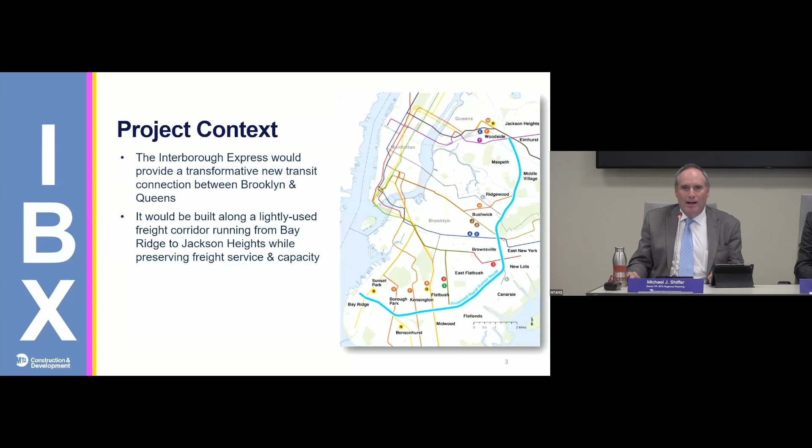The northern portion of the corridor in Queens, roughly the northern 3 miles, is owned by CSX, and the southern portion in Brooklyn, roughly 11 miles, is owned by the Long Island Railroad and operated by the New York and Atlantic Railway for local freight service. It currently carries up to 3 freight trains a day.

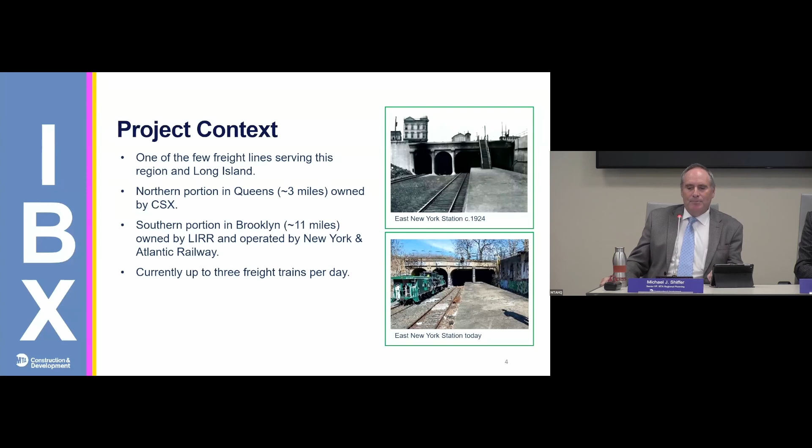Part of the reason why this is such an exciting project, really from a transportation planning perspective, is it hits a lot of marks very effectively. It's an exceptionally diverse study area. As you would imagine, looking at the center of Brooklyn and Queens, you've got a very diverse population. You've got a population that has low car ownership.

And you've got a population that could really use the mobility this could provide. Also, it's a substantial population. Almost 1 million people live within a half mile of the line. And many more people will benefit from the line by transferring from subways and other local transit services, such as buses and the Long Island Railroad. In addition, along this corridor, again within a half mile, there's over 250,000 jobs, and that's growing.

We've seen the growth of intra and interborough travel that doesn't involve Manhattan over the last few decades. It's really grown pretty substantially. And it's important to be able to serve that population. It's also important to be able to serve and continue to serve the travel to Manhattan as well. And so this, by connecting up to 17 subway lines and the Long Island Railroad, has the ability to provide a significant amount of mobility for generations to come.

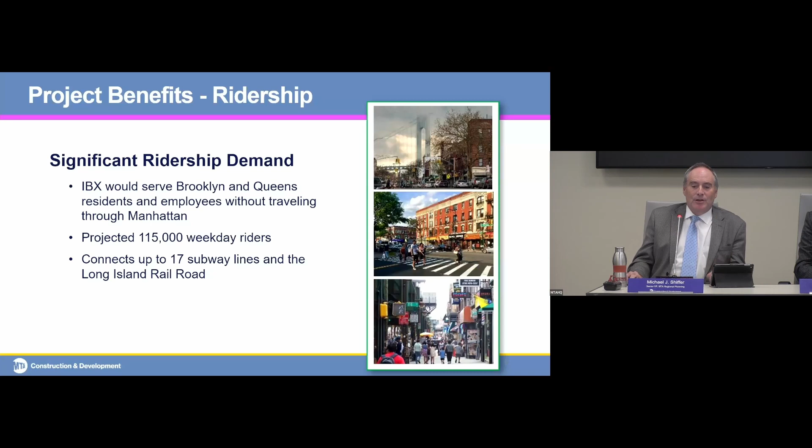As I mentioned, the Interborough Express, or IBX as we call it, would serve Brooklyn and Queens residents and employees without needing to travel through Manhattan. And we project, based on the mode selected, that it would carry up to 115,000 weekday riders. And as I mentioned, it can connect up to 17 subway lines and the Long Island Railroad.

In fact, the transformation it could provide is illustrated by an example where a person traveling from Bushwick to Brooklyn Army Terminal could save up to 26 minutes by taking the Interborough Express and not having to transfer through Manhattan. So this can offer significant time savings for many people. And we know there are so many different folks traveling in so many different ways throughout Brooklyn and Queens. There are many other opportunities for time savings, which is a key factor when you consider the effectiveness of public transportation.

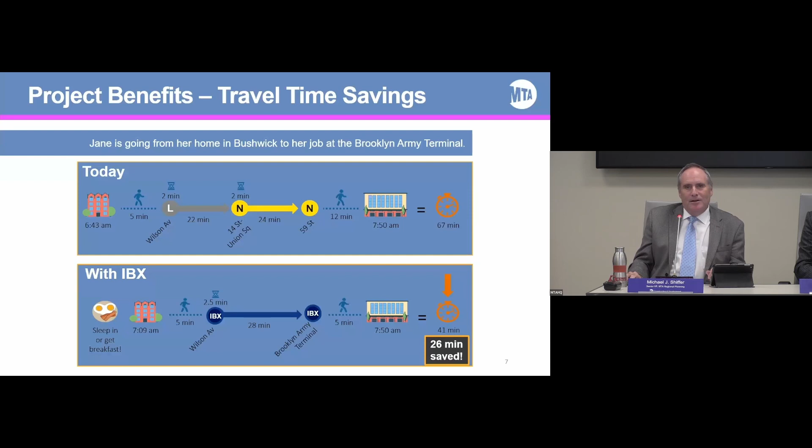Now, there's also freight in this corridor, and I should note that we're working closely with the Port Authority of New York and New Jersey, who are conducting their own study of the Cross Harbor Freight Program. They're looking at how to effectively assess rail alternatives for freight movement throughout the region's network. They've done a Tier 1 environmental impact statement already, and they are seeking a notice of intent for the Tier 2 environmental impact statement, which will measure cumulative impacts, including the impact on and with our Interborough Express proposal. So I should note that while the freight program is not an MTA project, we're working closely with the Port Authority to ensure that the projects are compatible and don't preclude one another.

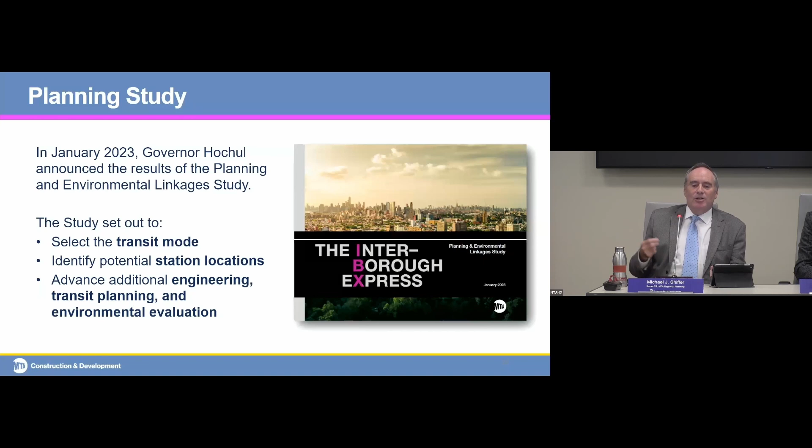So on to the planning study. In January of 2023, Governor Hochul announced the results of what we call a planning and environmental linkages study. The study set out to select the most effective transit mode in this corridor. It set out to identify potential station locations, not set in stone yet, but potential locations, and advance additional engineering, planning, and environmental evaluation.

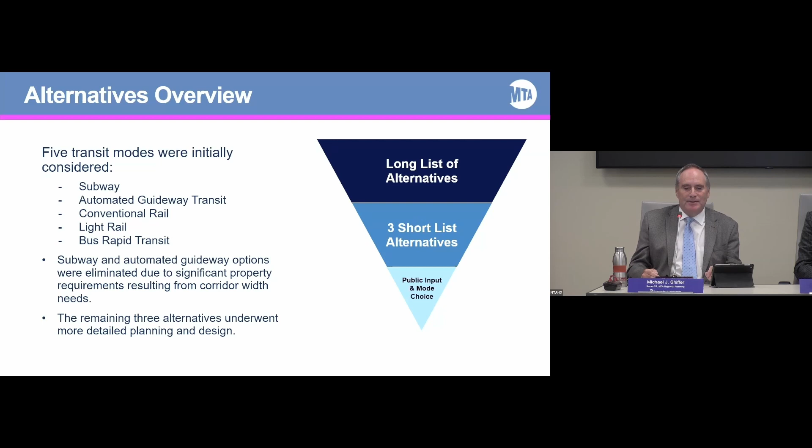We started by looking broadly at 5 transit modes, which included subways, automated guideway transit, conventional rail, light rail, and bus rapid transit. Subway and automated guideway options were eliminated through a fairly rigorous process that looked at what it would take to support them. The issue was the significant property requirements that would be necessary to support the corridor with their space needs. The remaining 3 alternatives underwent more detailed planning and design, and those included conventional rail, like the trains you could ride on the Long Island Railroad, Metro North, or New Jersey Transit, light rail, and we'll show some examples of that in just a little bit, and bus rapid transit.

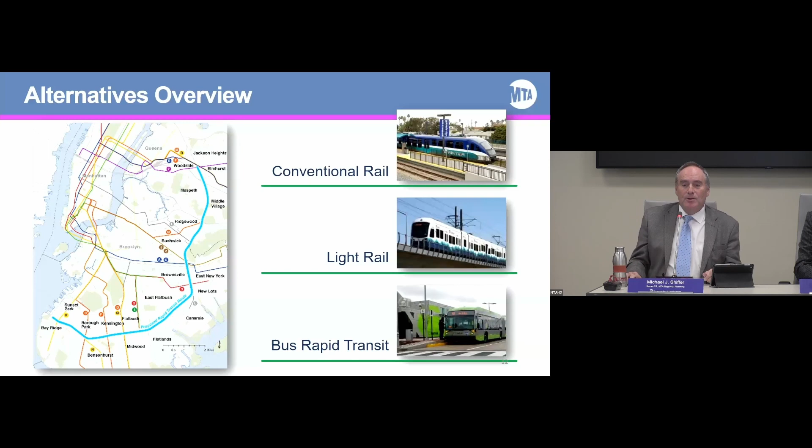That's more than just SBS on a reserved lane on an arterial road. SBS and bus rapid transit in this case is a dedicated roadway that's almost like a rapid transit line with its own dedicated station. So I'll talk a little bit about these three.

When we talk about conventional rail, examples include what we have right now for our commuter services. We're talking about rolling stock or cars configured more like transit vehicles, so they'd have fewer seats than a typical commuter train, more doors, and a more subway-like seating configuration. They would operate on separate tracks adjacent to the freight railroad, drawing power from an electric third rail. One thing we noted is that you would need cars of a specific smaller design to fit through some of the more constrained areas of this particular line.

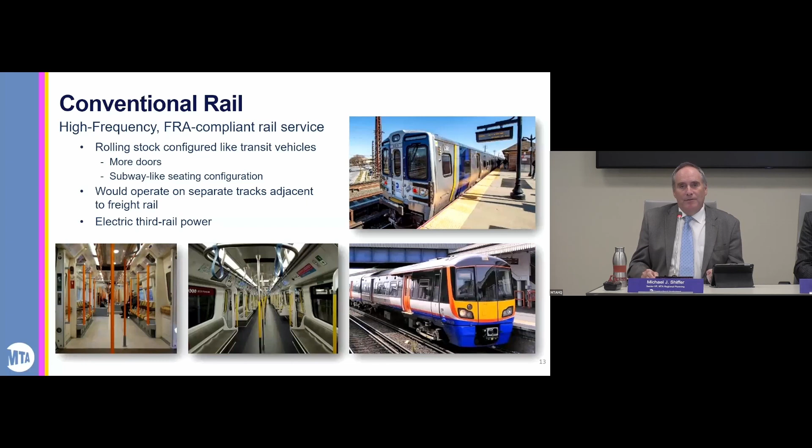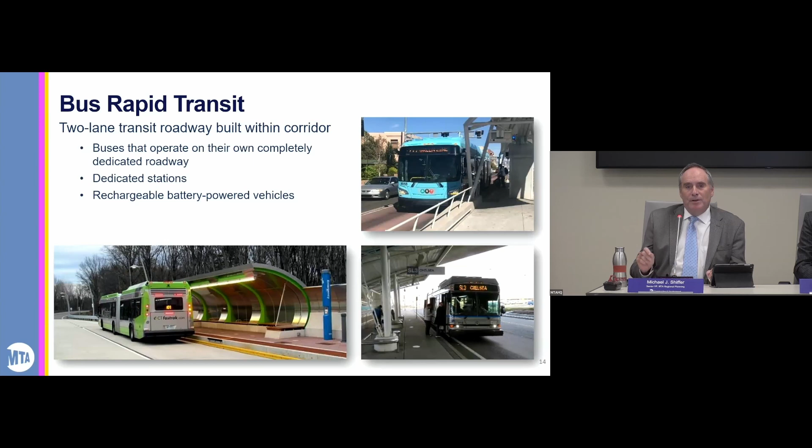We also looked at bus rapid transit. As I mentioned, bus rapid transit here is more than what we see with SBS in New York—it's really a dedicated busway. Some examples not far away include Connecticut outside of Hartford, as well as the Silver Line up in Boston, and other areas around the United States. You can try out bus rapid transit—it's buses that operate on their own dedicated roadway with dedicated stations, and these buses would be fully electric with rechargeable battery-powered vehicles.

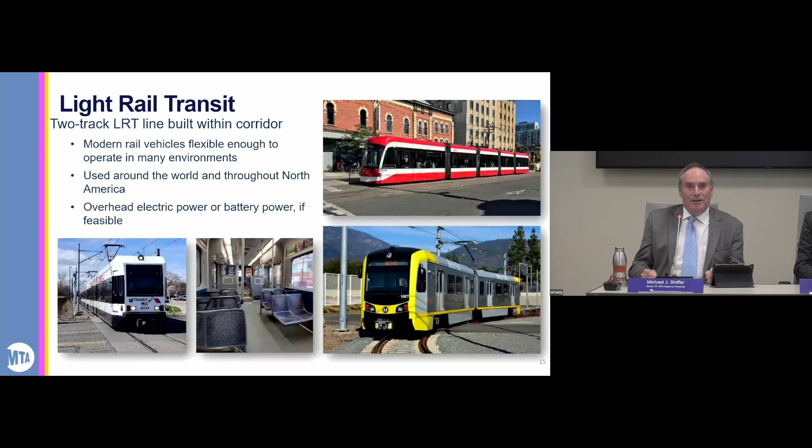The third mode we considered is light rail transit. Light rail transit vehicles are modern rail vehicles flexible enough to operate in many environments—they can operate in mixed traffic on streets, on a railroad, through tunnels, take very sharp turns, carry many people, and accelerate and decelerate very effectively. These are the modern descendants of the trolleys and streetcars of the past, and we've actually had those around these parts as well. But you don't have to go far to experience this mode—just go to Hoboken or Jersey City to ride the Hudson Bergen Light Rail and see it operating in a nearby urban environment.

In terms of analyzing the project modes, we chose light rail. The reason why we chose it is because, based on a number of factors which I'll get into in a moment, it provided the best value for our customers and the best service as well.

The running time noted here is 39 minutes end to end, but very few people would ride all the way end to end—you're not necessarily riding from Jackson Heights to Bay Ridge. You're riding intermediately through various parts of the line, connecting to subway lines and buses and so forth. For those short trips, light rail trains are very effective because they have an effective acceleration and deceleration profile, so they can start and stop smoothly.

They also have significant capacity. Each train of two multi-section units, put together, could carry 360 passengers, expandable to a third unit if you need to expand capacity in the future. As designed, this has the capacity to handle 115,000 projected daily weekday riders, and based on this, the cost per daily rider in 2027 inflation-adjusted dollars is about $48,000.

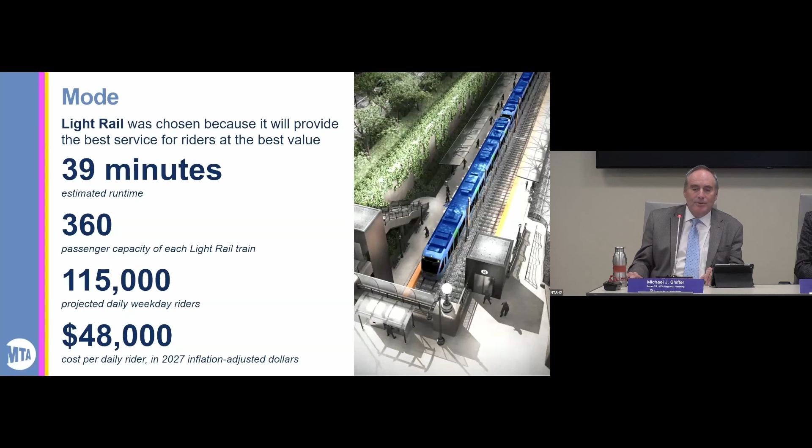This is all outlined in the reports that you can get to online. Light rail, as I mentioned, is effective in terms of its speed profile and its ability to board and let off passengers effectively, so it has good capacity.

On the other hand, with bus rapid transit—which we looked at very seriously—the issue was that the articulated buses available to us in the US, two-section articulated buses like the ones we see around town, do not have the capacity of a multi-section light rail train. So you'd have to run the buses much more frequently, and you start running into the limitations of traffic, especially in Queens, where you'd have to turn the buses on city streets to get them operating in the other direction.

So there were some significant challenges with respect to bus rapid transit, which would affect reliability as well. Light rail can operate on a reserved right of way for most of it. There is a portion where it would need to leave the right of way to traverse and get around a cemetery, and we're looking at all options to see if there are other ways to do that.

The point is that bus rapid transit, because buses are single-ended, you need to basically turn them around and find enough space to do it. So they could get bogged down on city streets in that manner.

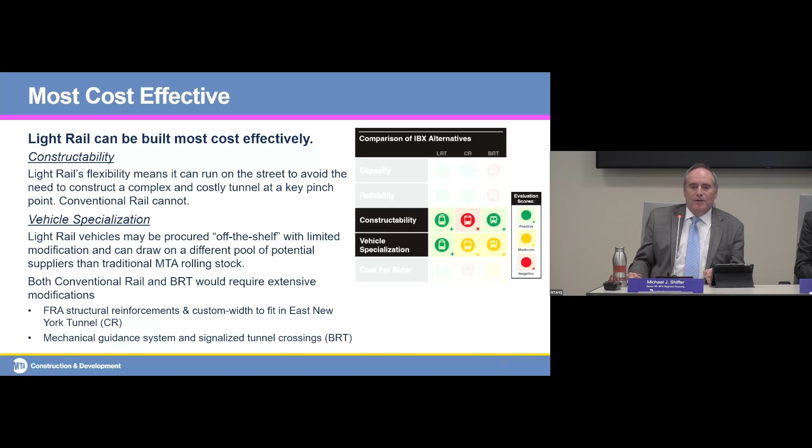So really, those are some of the benefits of the light rail vehicles. Most notably, again thanks to its high ridership, it offers effectively a cost of $48,000 per daily rider. The construction budget is $5.5 billion in 2027 dollars. That's a lot of money, but it's actually more cost effective than conventional rail, which would be more due to the need to build more tunnels.

It also is more effective from a cost perspective than bus rapid transit, because bus rapid transit doesn't have the capacity to move as many riders. So that kind of sums up the analysis at a very high level. I encourage you to look at the materials posted online that get into a lot more detail about the selection from a technical perspective.

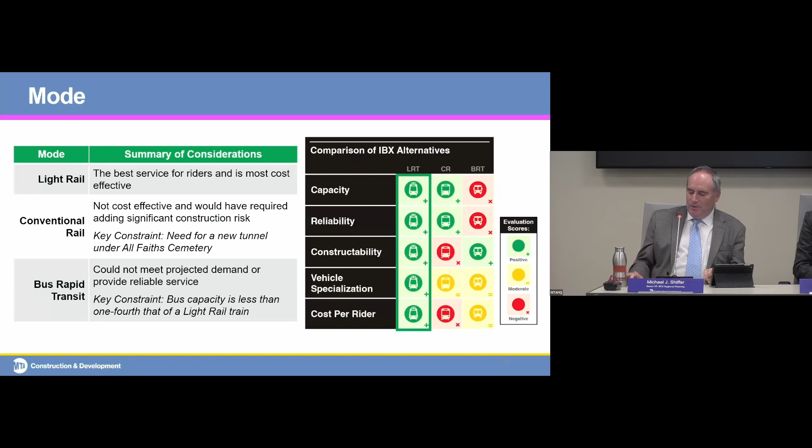Next are station locations. The current station program was developed so that we could maximize transfers within the MTA network, as well as transfers to major arterial roadways, many of which have significant bus lines as well. Right now there are 19 proposed stations on the IBX, and 13 of those would have transfers to subways, connecting to up to 17 subway lines.

Some of those transfers aren't direct. You have to walk sometimes a block or two to make the transfer, but we feel you could do that within the system using the OMNY card or associated fare media, in the same manner that many other people make transfers on modern day transit lines. It also offers transfers to the Long Island Railroad at Atlantic Avenue.

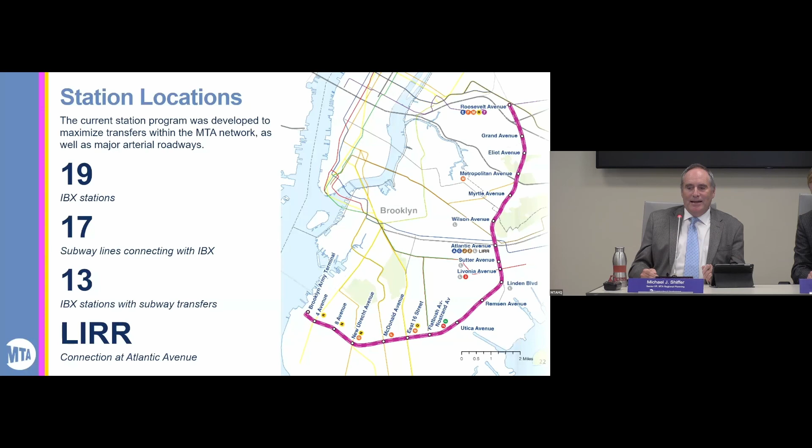When we looked at the station program, we considered public feedback, and we were heartened to see over 1,000 people drop pins on the electronic map of where they would like to see the stations. It was no surprise that many of the places where the public wanted stations were where it would make sense.

That was at intersections with subway lines and major arterials. We also looked at ridership - what's the catchment area of a particular station, or the likelihood of transfers from another transit line to the Interborough Express at that location. We looked at transfers, we looked at constructability - where can you reasonably construct a station - and then how can you effectively space these stations along the line.

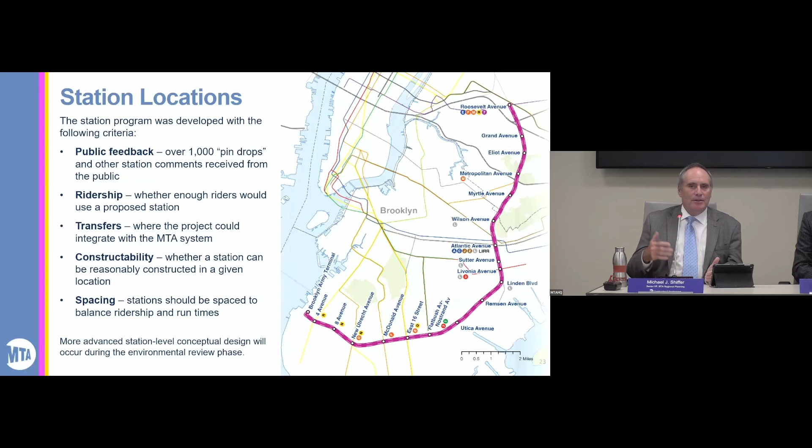There's going to be more advanced station level conceptual design once the environmental review phase starts to really take shape. That's where we and our consultants will work with the public in terms of some of the contextual sensitivity and needs, and really the environment around specific stations. That gets into things like accessing the line, whether you're transferring from transit, from a bike, as a pedestrian, how does it relate to its environment.

We're also looking at the engineering and planning of the line. You can't just throw a couple of transit tracks down next to the freight - it really needs to be reconfigured. It doesn't mean we're going to move outside the bounds of the right-of-way, but the right-of-way itself may need to be reconfigured in a manner you see on this diagram, so that you could fit transit services as well as maintain the existing freight operation. But that means rebuilding up to 45 bridges along the way.

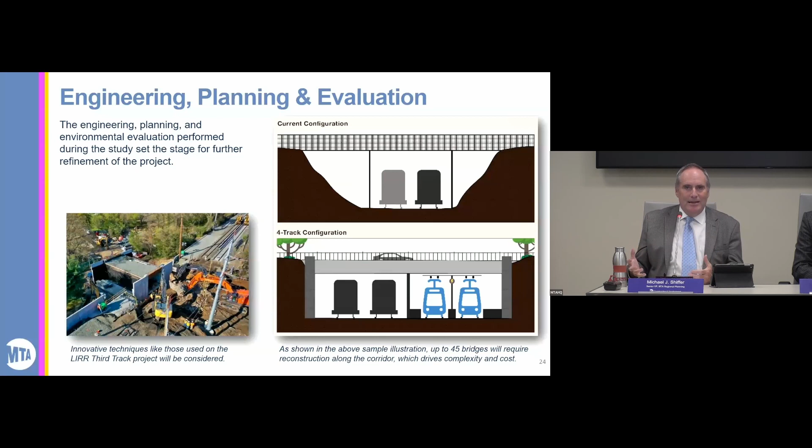And that's where a lot of the expense is incurred, especially because some of those bridges include elevated trains as well as roadways. So you have a lot of complexity throughout this right of way.

So where does that bring us in terms of next steps? Well, this project represents a rare opportunity to really leverage our existing network effectively. We already have right of way. We have this line. Let's use it to its highest and best use and build a new transit line.

And with the identification of light rail transit as the preferred mode, the next step is going to be to begin what we call the scoping phase of the environmental review. And that involves looking more at the detail of the design of the line, how it intersects with different things, and of course the stations themselves.

And that's where you come in handy, because we need you, we need your support, and we need your engagement. We need you to explain to us some of the key constraints and things that the designers, the planners, and the engineers need to be aware of from a community perspective. So we look forward to engaging you as we move ahead in this process.

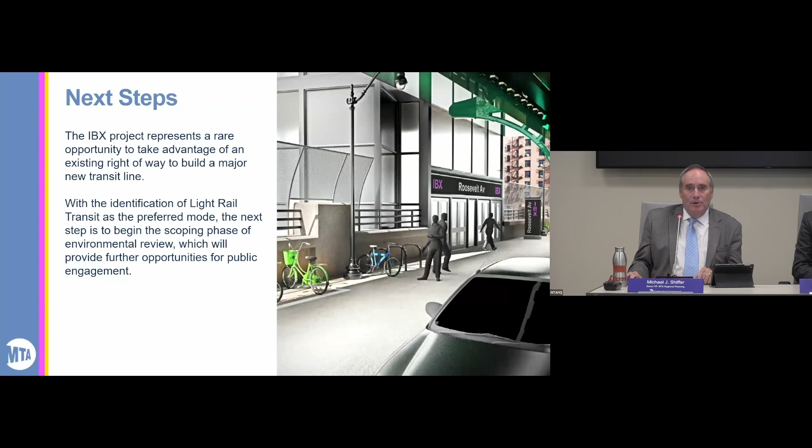In terms of the environmental review, it's something we conduct to maintain eligibility for federal funding. And we also conduct it because it's the right thing to do. We need to understand and look thoroughly at how this process will impact the neighborhoods, what's its effectiveness, and what we need to take into account to make it the best thing we can make it for the communities that it serves.

Throughout this process, as I mentioned, we're going to elicit and consider your comments through public outreach and hearings. As the governor announced on August 2nd, a consultant, WSP, has been selected to assist MTA with this. And they're going to support us with some of the station level conceptual design that I was talking about, as well as assist us with the preparation of the environmental impact statement.

So we're still very early in this process. I don't want to leave you with a sense that this thing is going to be done within a year or two. It's going to take a while. Quite frankly, the environmental review alone is a 2-year process when a notice of intent is issued, and that we anticipate probably at some point in the next few months.

So the environmental review is conducted. Then there is, of course, a process where it's looked at. There's preliminary engineering that may take place then if it's decided to advance this project. And then, of course, there's the whole concept of funding and whether it fits in our capital program. And then, of course, there's the actual construction of the project itself.

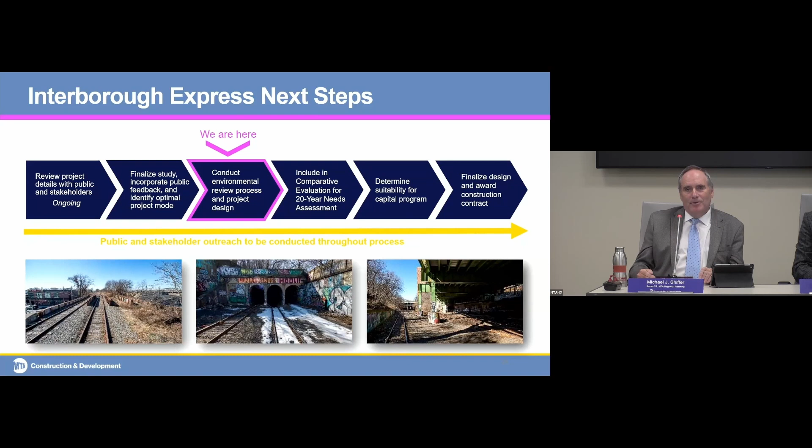And so the governor, as well as a lot of key planners throughout the region and leaders, saw that this may be a promising project. And so that's why we're doing the work we're doing now to better understand how it could support our region.

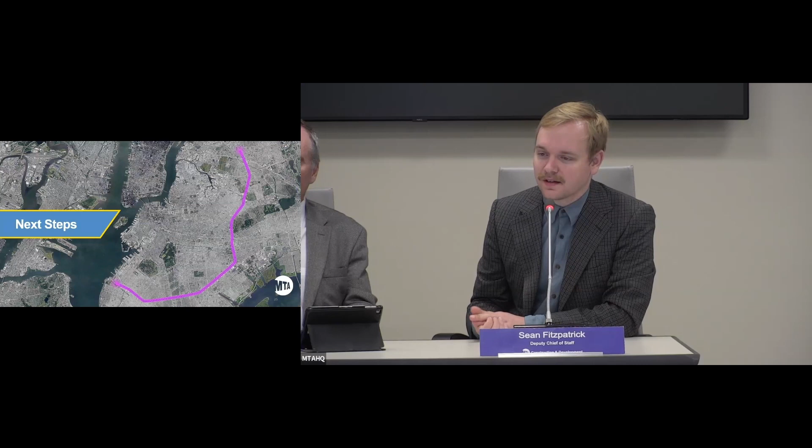You've touched on this, and I think it's relevant to get into in a little more detail. We've gotten some questions about the need to widen the right of way or fortify the existing right of way. As the diagram you showed spoke to, there are sections of the right of way that even if in theory the property line is wide enough to accommodate two tracks for the IBX as well as maintaining freight access, a fair amount of construction work is going to be needed to accomplish that. Can you say more about what that process would look like and what our planning process will entail on this front?

Well, I think you kind of answered the question there - a lot more is going to be needed in terms of design to get it to work effectively. Really, this illustration is very simplified, but it gives you a rough idea of how to fit light rail in constrained environments. What that involves is looking at what the property constraints are, what the physical attributes are around the right of way, and how it can fit and what needs to be constructed or reconstructed. That's where, as we get into conceptual engineering phases and so forth, that will be uncovered in much greater detail.

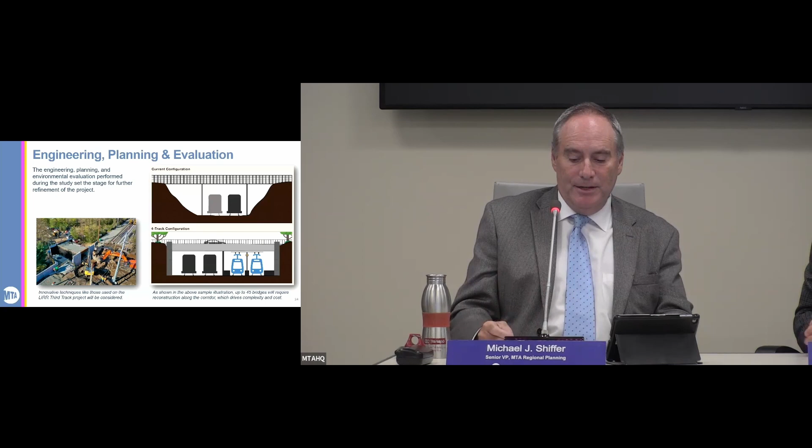I will also take advantage now, especially because we have the slide - leave it up for a second - to point out the photo on the left, which is from our Long Island Railroad third track project, which opened to the public last year and is part of the successful push to significantly increase the capacity of the Long Island Railroad. That required the reconstruction of a substantial number of bridges, and we were able to use innovative techniques, constructing a bridge offsite and then pushing it into place literally over the course of a weekend, with much more minimal disruption to service and traffic than would have otherwise been required.

So I think this is a daunting challenge as we look at this project, but it is one where we have a track record of success, and some very smart engineers who have come up with innovative ways to address it. That project was ultimately able to be completed at $100 million under budget and on time, which we take a fair amount of pride in.

Yeah, I think this is a key constraint of the right of way and is part of what makes up the cost estimate that you described. A lot of it is in the reconstruction of these bridges, but I think we have a good track record for getting that type of work accomplished.

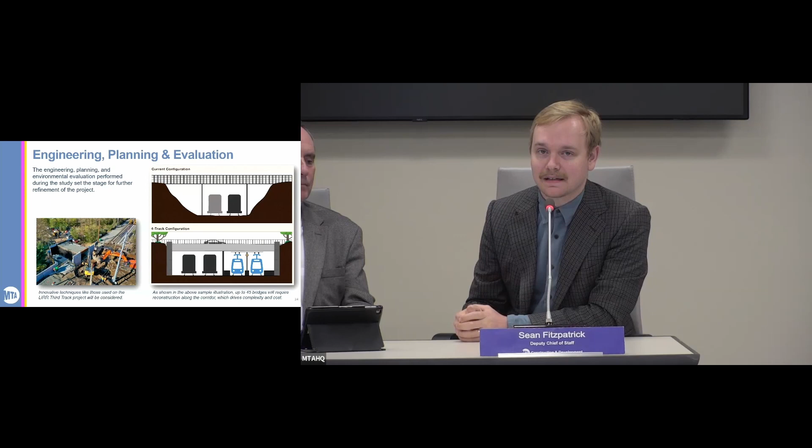It relates - we've gotten a lot of questions also about this, we're talking about how we will take every effort to... The slide you just jumped to briefly is just to note, this is pulled from the planning and environmental linkages study that you can find on the website, so folks don't need to screenshot it rapidly. They can get to it at new.mta.info/IBX. But you can go back to the Q&A slide.

Another question related to fitting within the existing right of way: will there be property acquisition needed, and what can we say about the potential need to go outside the right of way? I think it's too early to tell, really. It's primarily within the right of way of existing MTA and CSX right of way, so we're talking to CSX as well since they own part of it, and we're talking to the New York City Economic Development Corporation, who owns some land near the Brooklyn Army Terminal. That said, as we go through this, it will become more clear whether any properties are affected.